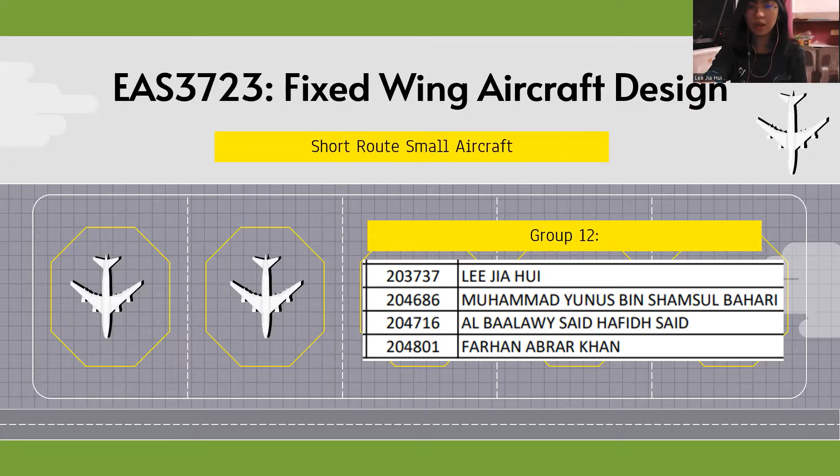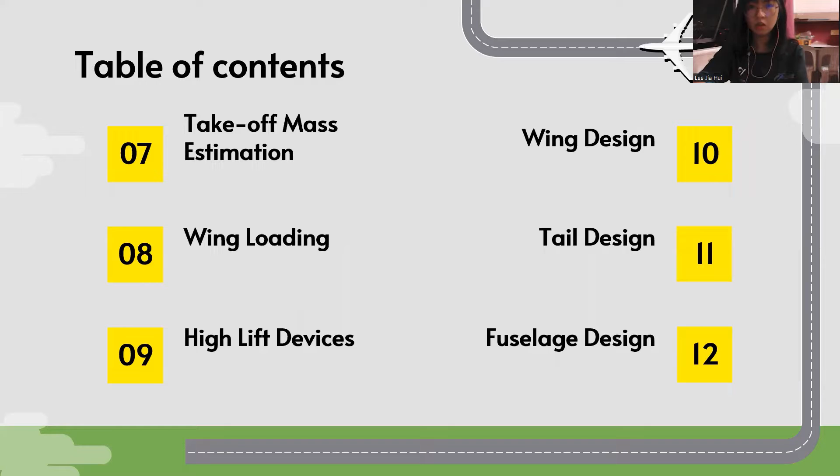So we will go through research of aircraft, engine selection, thrust-to-weight ratio, distance covered during climbing and landing, mission profile, basic parameters, takeoff mass estimation, wing loading, high lift devices, wing design, tail design, fuselage design, propulsion system, landing gear, electrical system, materials and fabrication of structural components, operational consideration, and lastly, market research.

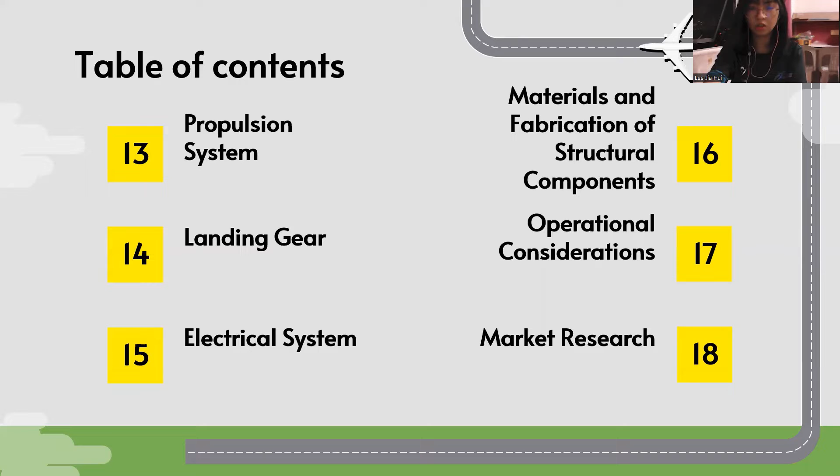The research of aircraft: we did research on 5 aircraft from small size to medium size. After the research, we chose a suitable engine for our aircraft. The engine we chose is a 4-engine turboprop.

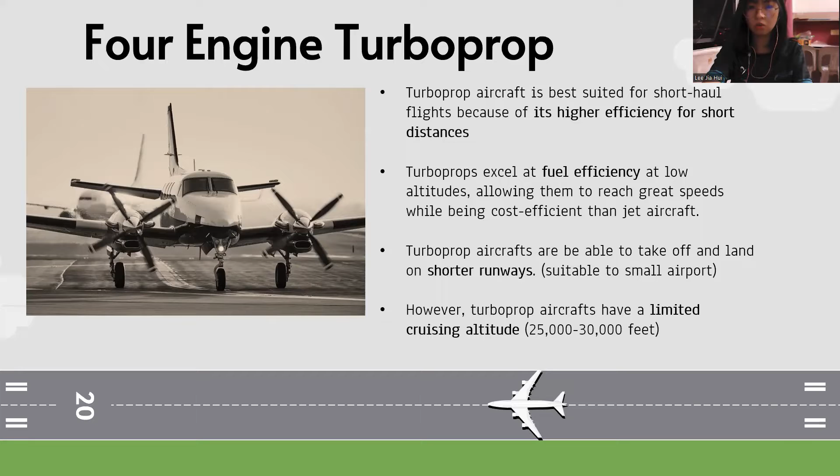Turboprop aircraft are best suited for short-haul flight because of their higher efficiency for short distance. Turboprop excels at fuel efficiency at low altitude. Turboprop aircraft are also able to take off and land on shorter runways, so it is suitable for small airports. However, turboprop aircraft have a limited cruising altitude, which is from 25,000 feet to 30,000 feet.

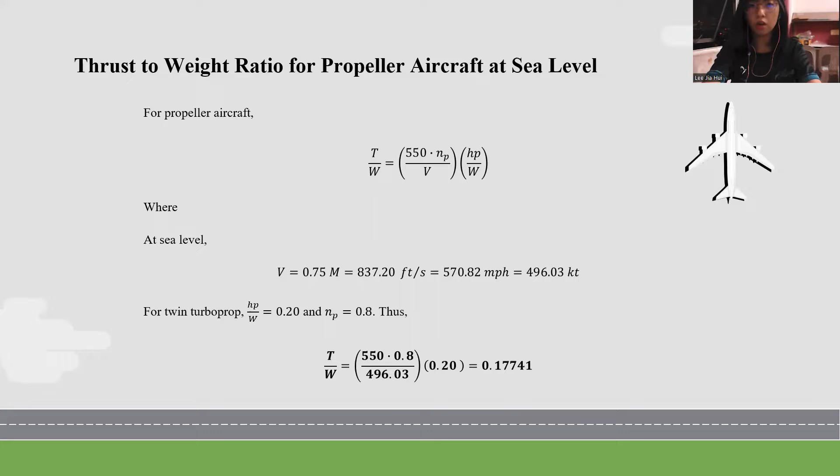The third part is the thrust-to-weight ratio. Thrust-to-weight ratio for our aircraft at sea level is 0.17741. Now we are going to show distance covered during climbing and landing.

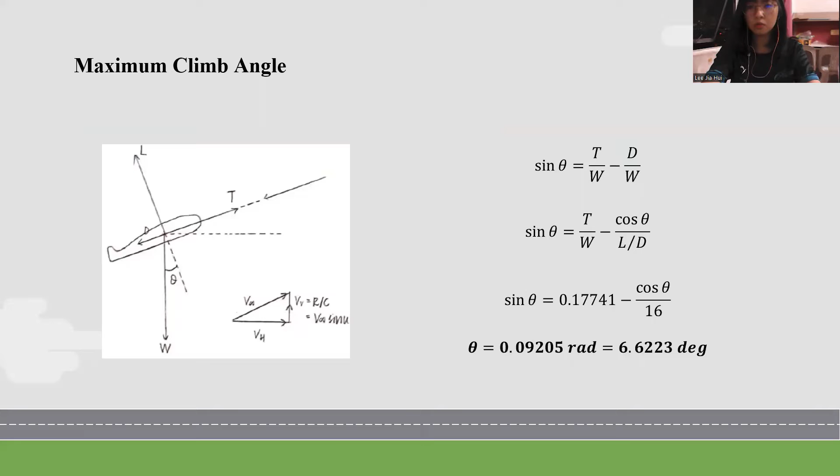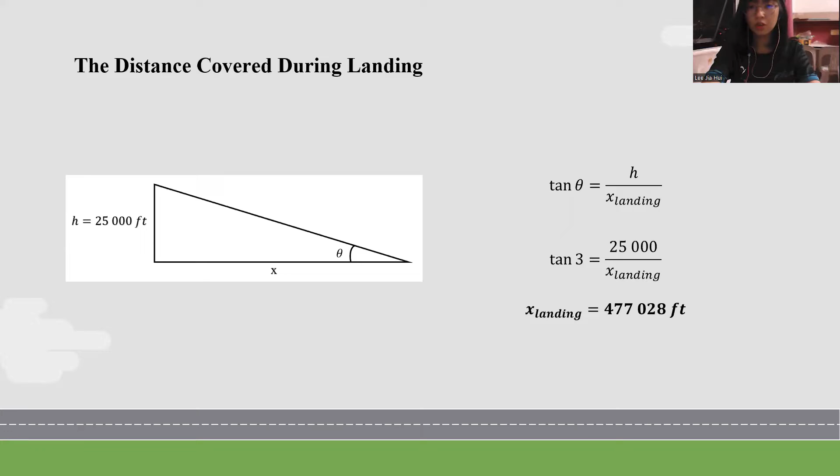The maximum climb angle is 6.6223 degrees, so the distance covered during climbing is 215,000 feet, and the distance covered during landing is 477,000 feet at 3 degrees of descending.

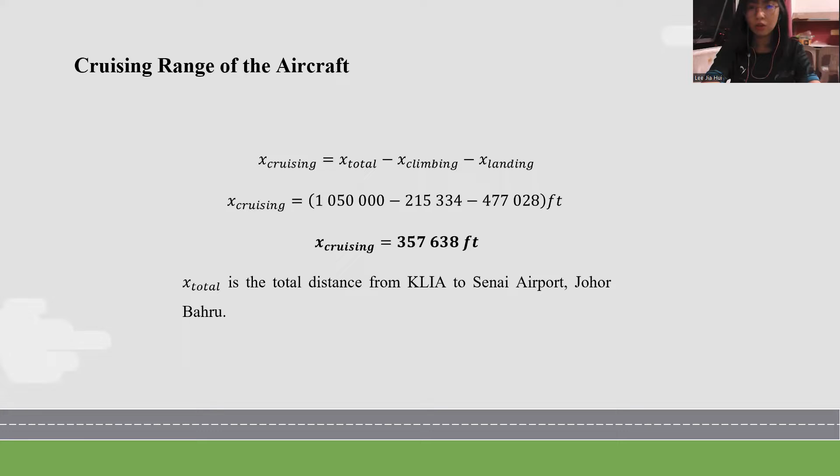The cruising range of the aircraft from KLIA to Senai Airport is 357,000 feet. Now we are going to show the mission profile.

First, the aircraft warms up and taxis for 10 minutes. Later, we will take off and climb to cruise altitude, reaching 25,000 feet. Later, it will descend to sea level, which gives range credit.

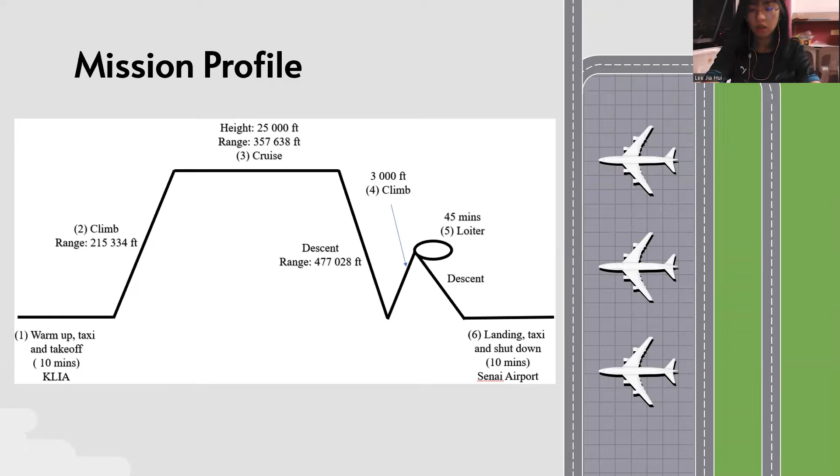After that, it will climb back to 3,000 feet and loiter at best endurance speed for 45 minutes and descend to sea level with no loiter time credit. And lastly, we will land, taxi, and shut down in 10 minutes.

There are a few basic parameters in our calculations. The total capacity is 40 passengers, while the mission capacity from KLIA to Senai Airport is 20 passengers, with 50% of total passengers. The engine type is 4 turboprop engines.

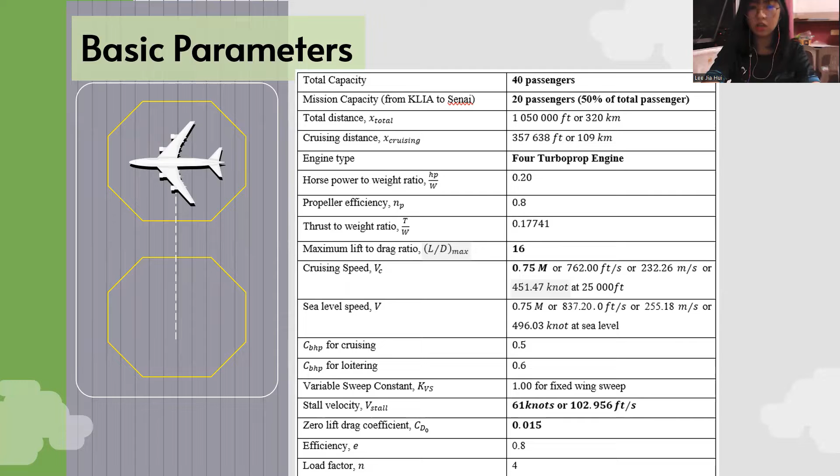The maximum lift-to-drag ratio is 16. The cruising speed is 0.75 Mach numbers. The stall velocity is 61 knots, and the zero lift-drag coefficient is 0.015.

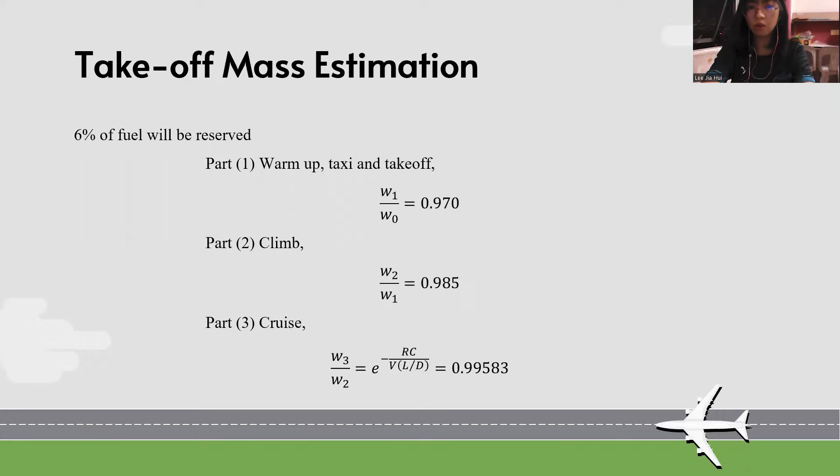The takeoff mass estimation: 6% of fuel will be reserved. There are some estimations from part 1, warm-up, taxi, and takeoff. Part 2, climb. Part 3, cruise. Part 4 is climb again. Part 5 is loiter. Part 6 is landing.

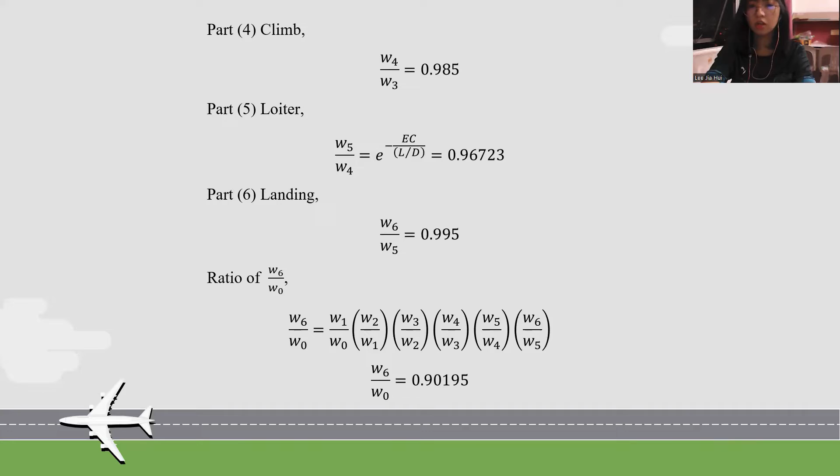So the ratio of part 6 to part 0 is 0.90195. So the ratio of fuel weight to maximum takeoff weight is 0.10393. Lastly, for single pilot, 1 flight attendant, and 20 passengers, the maximum takeoff weight is 6,560 kg.

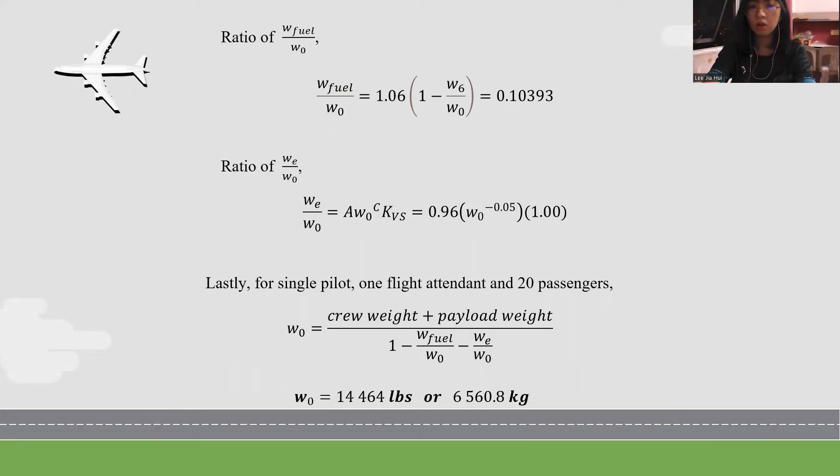The wing loading: we calculate the wing loading for takeoff condition, for stall condition, for landing condition, for cruising condition at maximum range, for cruising condition at maximum loiter, and lastly for sustained turn condition.

The lowest wing loading should be chosen to guarantee that the wing provides appropriate lift. The lowest wing loading is wing loading at stall condition, which is 10.17. Since the wing loading at stall is the lowest, the wing should be equipped with a high lift device.

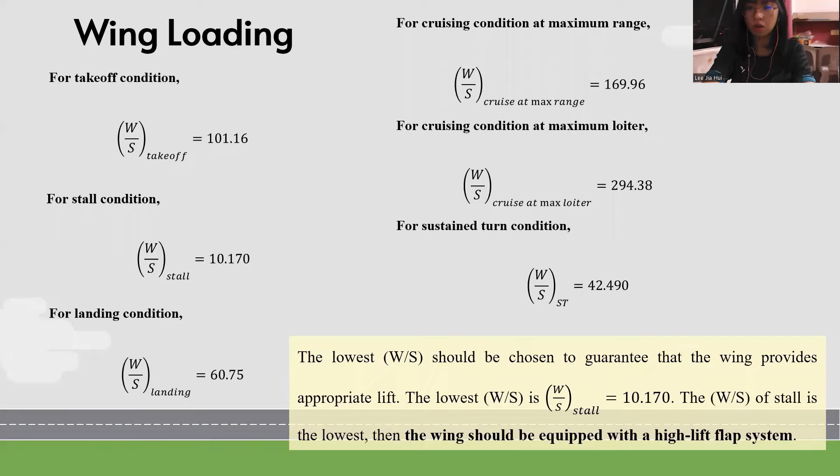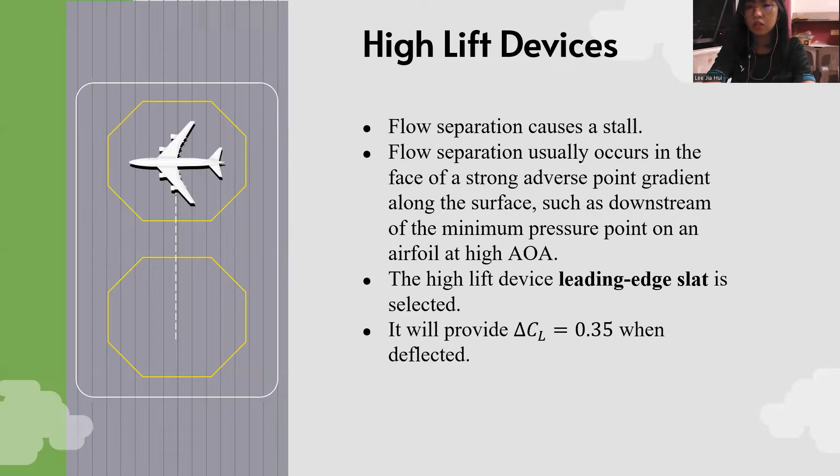So for high lift devices, we choose leading edge slats. Flow separation causes a stall. Flow separation usually occurs in the face of strong adverse pressure gradients along the surface, downstream of the minimum pressure point on an airfoil at high angle of attack. So it will provide an additional 0.35 of lift coefficient when deflected.

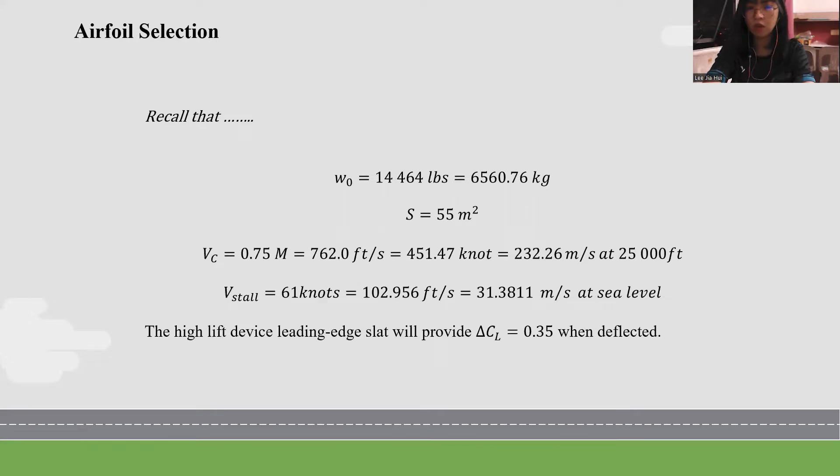The 10th part is the wing design. Before that, we recall that the maximum takeoff weight is 6,560 kg. The wing surface area is 55 meters square. The cruise speed is 0.75 Mach numbers, and the stall velocity is 61 knots.

So for ideal lift coefficient, the ideal lift coefficient is 0.092344, while the maximum lift coefficient is 1.9191. The following airfoil is matched with the design requirements, which is NACA 64112.

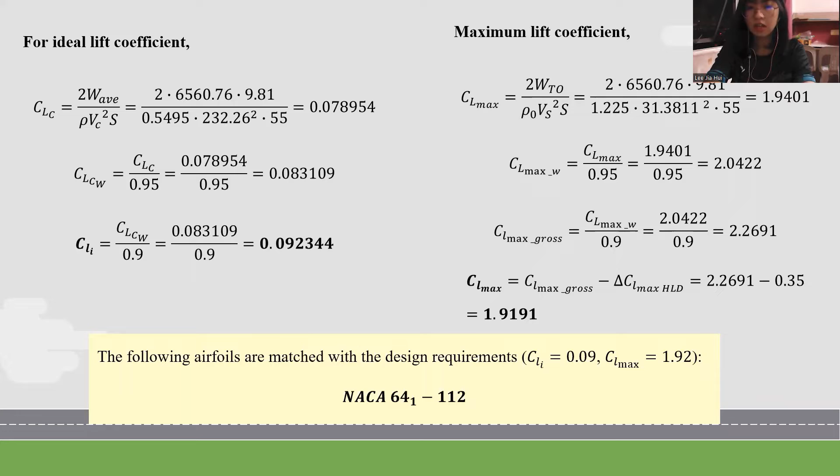Now we'll go to the flap parameters. The takeoff speed of the aircraft is about 10% faster than the stall speed. So the takeoff speed is 34.519 meters per second. The lift coefficient during takeoff is 1.6034.

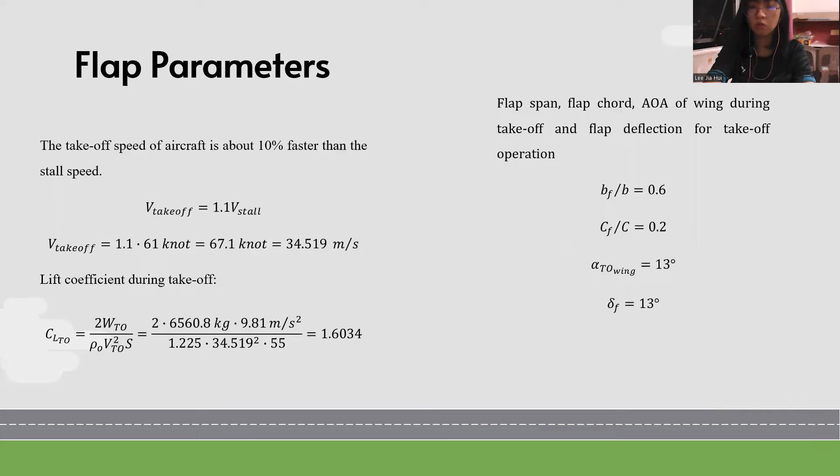There are some values for flap span, flap chord, angle of attack of wing during takeoff, and flap deflection for takeoff operation. The wing lift coefficient while the flap is deflected during takeoff operation is calculated using MATLAB. However, the value we calculated using MATLAB is slightly lower than the required takeoff lift coefficient.

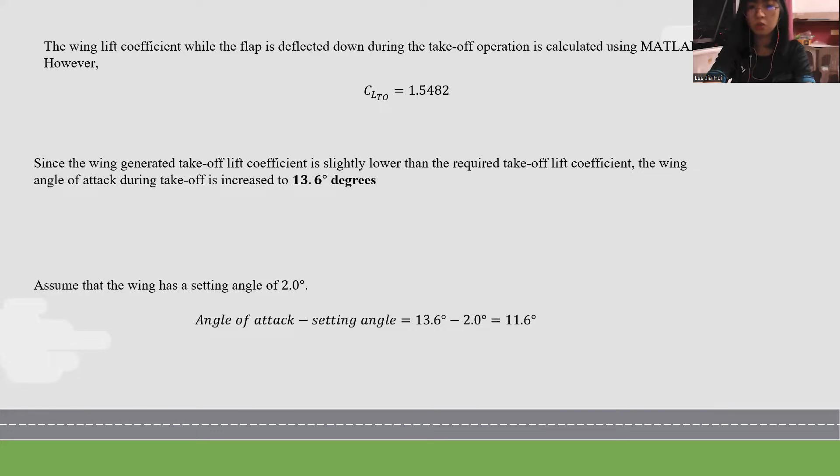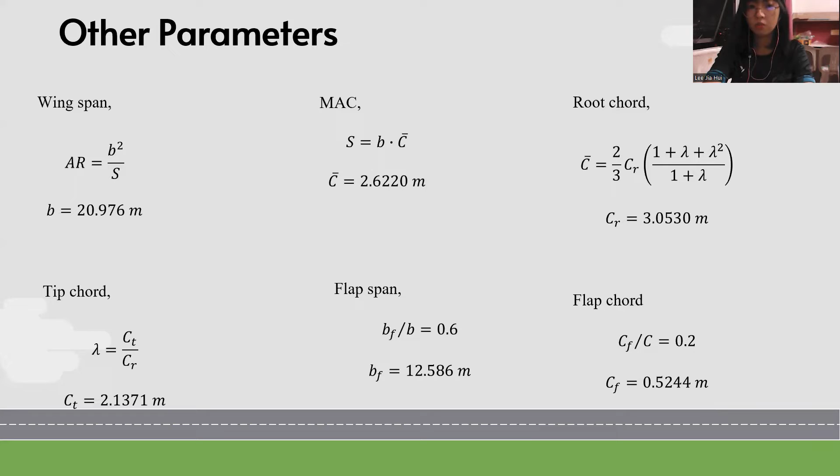So the wing angle of attack during takeoff is increased to 13.6 degrees. The setting angle is 2 degrees. So there are some calculations for other parameters, which are wingspan, mean aerodynamic chord, root chord, tip chord, flap span, and also flap chord. So we can see that the length for root chord is 3.05 meters, while the length for tip chord is 2.14 meters.

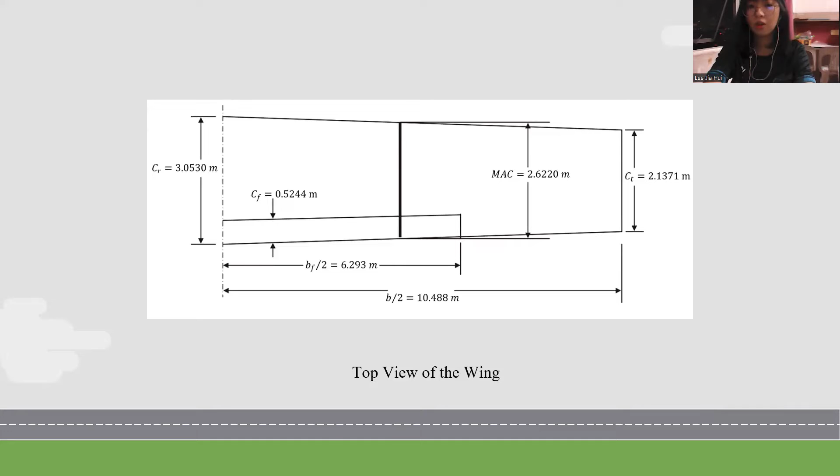The mean aerodynamic chord is 2.62 meters. The flap chord is 0.5244 meters, while the half of the flap span is 6.293 meters. The half of the total span of the wing is 10.488 meters. This is the side view of the aircraft.

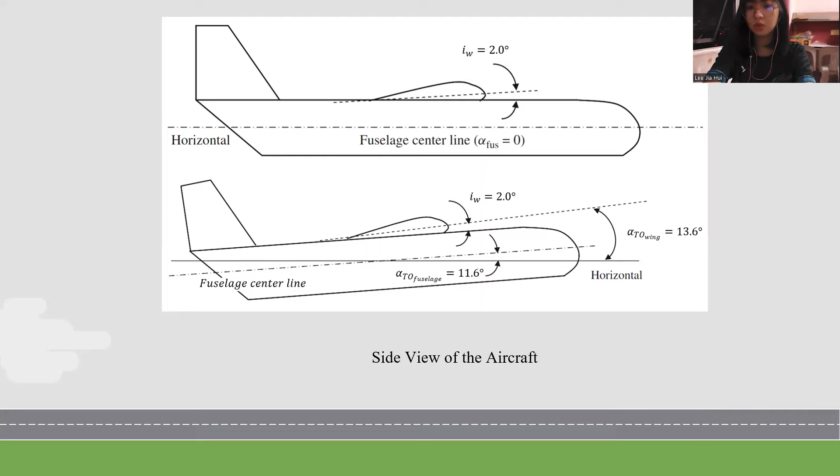The setting angle is 2 degrees. The takeoff angle for wing is 13.6 degrees, while the takeoff angle for fuselage is 11.6 degrees.

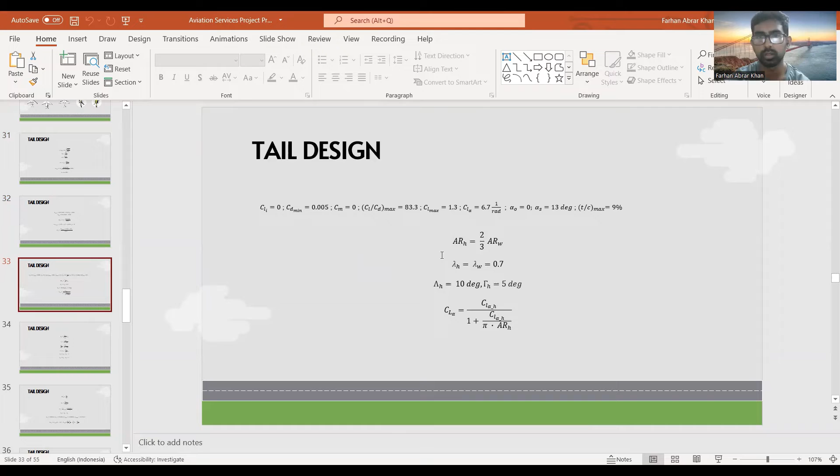So over here we have 5 to 6 values given to use in these equations below. Then afterwards we find these values, and lastly by finding this value we can know that this airfoil is NACA 0009.

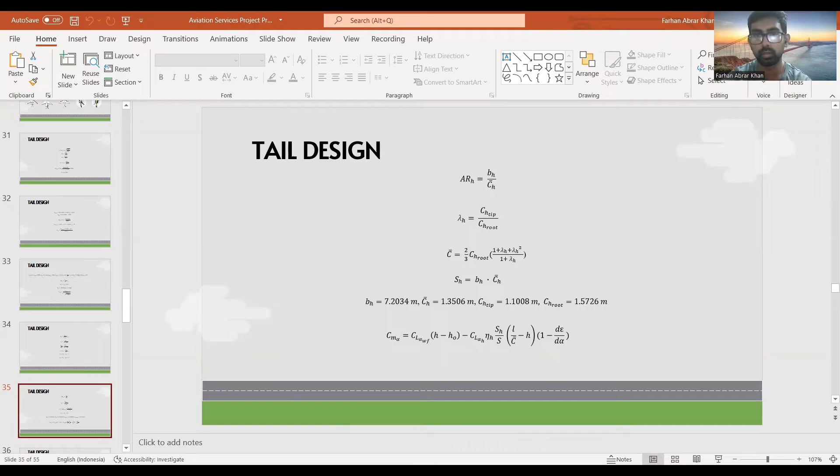So then we use these most important equations, and we find these parameters, and we use this last equation. All of this is given in this table. All of these values were calculated in the report, and over here you can just see the answers.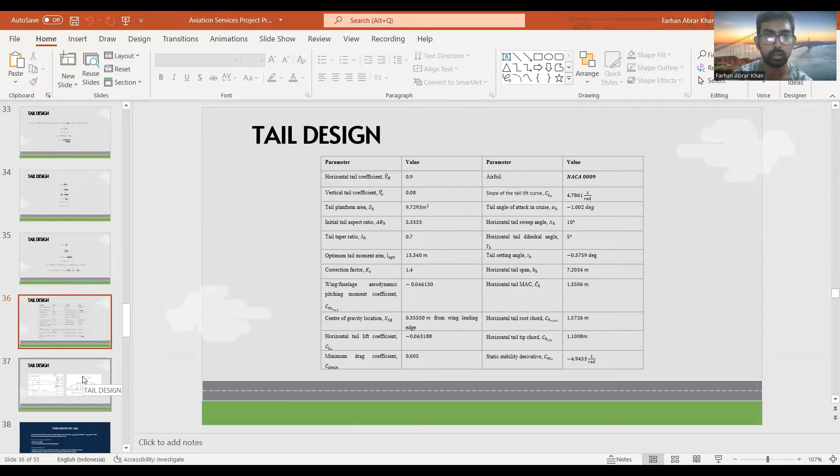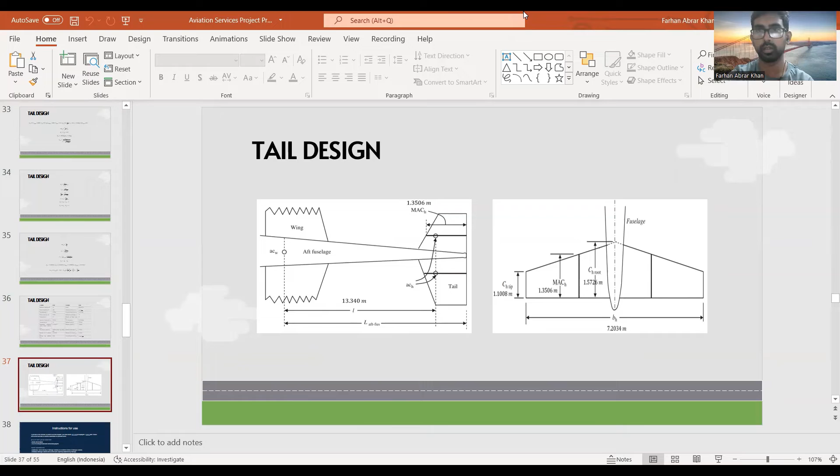And lastly, from all these answers we have come to this design. Over here you can see the length, the MAC, the chord depth, the breadth, and everything. So this is our final tail design. Thank you very much, that's all from me, and I'll let my friend continue the presentation.

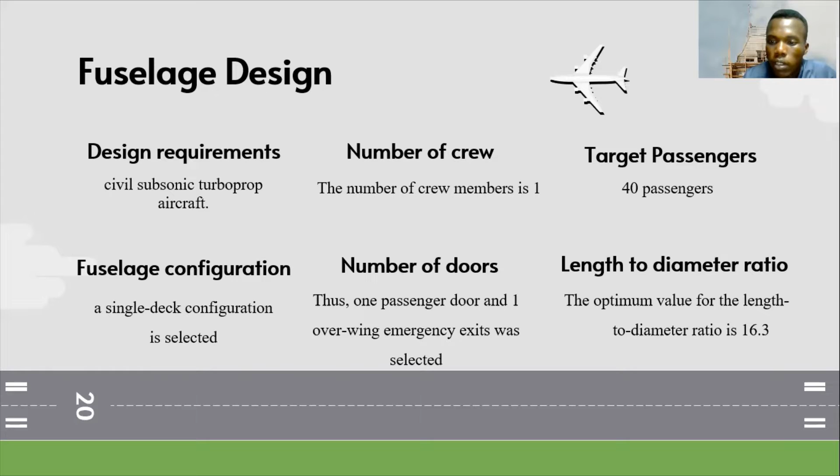Okay, I'm going to continue with the fuselage design. From the design requirement, it is a civil subsonic turboprop aircraft. Number of crew is 1 pilot. Total passengers will be 40. Fuselage configuration is a single deck. Number of doors is 1 passenger door and 1 overwing emergency exit, and the length to diameter ratio optimum is 16.3.

The possible configurations for our seats are shown here, and from the width of the cabin formula we can get NS, the number of seats in one row, WS, the width of the seat, NA, the number of aisles, and WA, the width of the aisle. So we can get the diameter of the fuselage by calculating the width of the cabin and increasing the thickness of the walls. Length of the cabin can be calculated from this formula, where we include the length of the nose, the cockpit, the cabin, the rear end, and the toilet together with the galley.

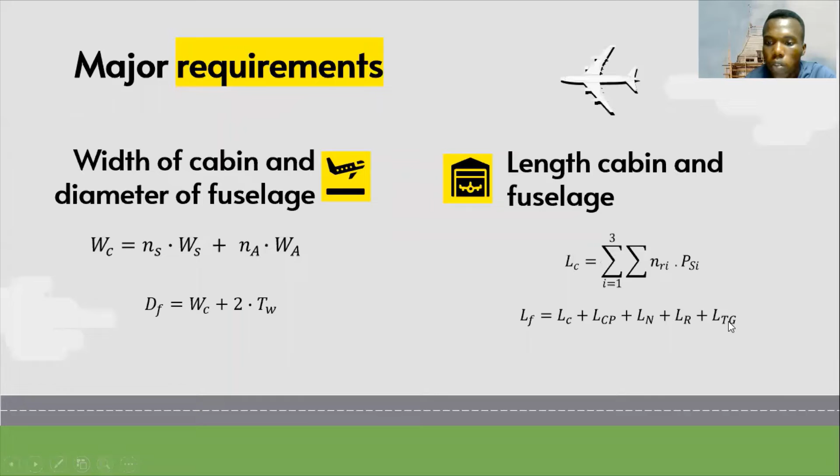So the fuselage designs are all calculated, and the optimum one is selected to be 3 seats in one row, with a total of 40 seats, and the length to diameter ratio is 10.6.

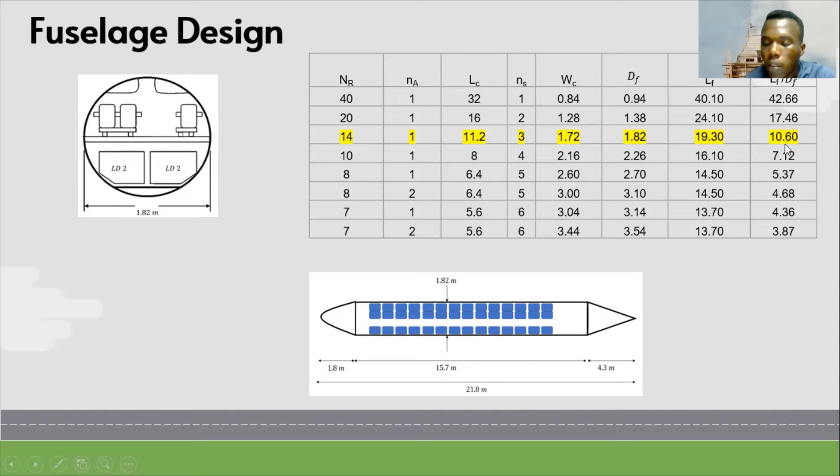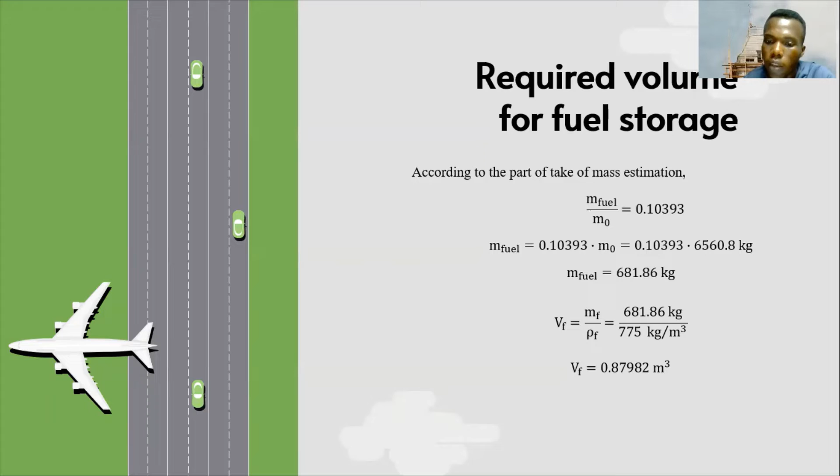The volume required for fuel storage is calculated here by using the MF to M0 ratio in the TOGW calculation, and we get the volume of fuel to be 0.87982. This fuel volume is combined with the volume of the cargo, and we can calculate whether the volume is sufficient or not from the volume of the total cabin.

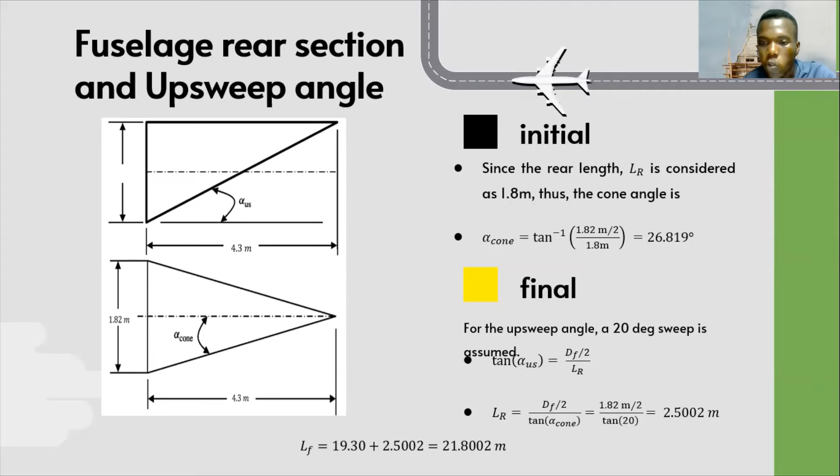For the fuselage rear section and the upsweep angle, we select the initial rear length to be 1.8, and the angle of the cone is 26.819, but it seems much higher than the suggested one. So we are going to select an upsweep angle of 20 degrees, and the length of the rear end is updated to be 2.5 rather than 1.8. Hence, the length of the fuselage is moderated. Thank you.

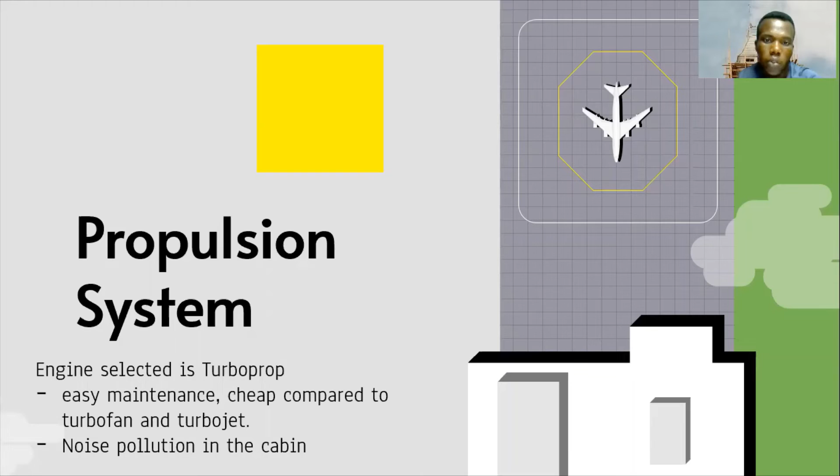For our aircraft, we selected the turboprop engine because it's easy to maintain and cheap compared to turbofan and turbojet, and it has less noise pollution compared to the piston engine. From that, we are going to calculate the engine thrust and the power required during cruise.

So from the formula of the coefficient of lift and K, we can get the coefficient of drag. And from the coefficient of drag, we are able to get D, the drag force. And since for an aircraft to fly, the thrust must be equal to the drag force, we get the thrust force to be 12478 Newton.

And from that, we can calculate the power of the engine if we have the velocity of cruise and the efficiency of the engine. Both values we have, and we can get the power required during cruise. From the power required during cruise, we can get the power required at sea level, and both values are displayed here: 4858.1 and 12717 horsepower.

The diameter of the propeller and the propeller rotational speed can be calculated from the formula of the diameter of the propeller. We can get all the values: the aspect ratio of the propeller, the efficiency of the propeller, and the power. From that, we can get ω, the rotational speed, and we can get the number of revolutions per minute N from the formula of 60 times rotational speed over 2 pi.

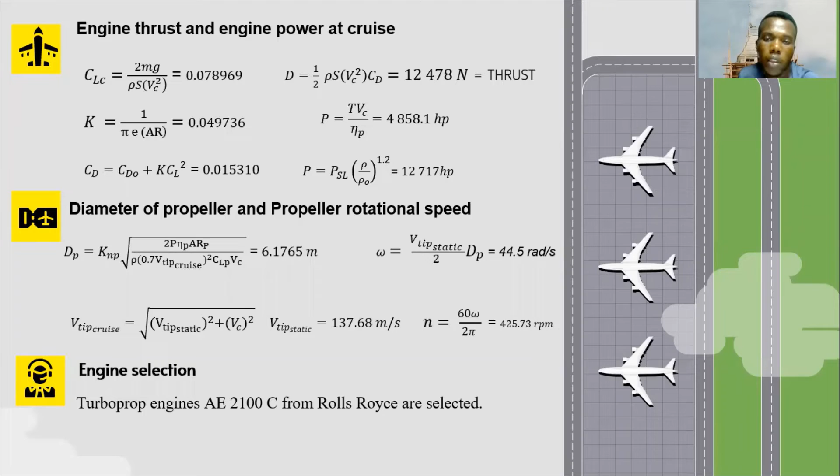And lastly, from the data of the power required, we can select our engine. So the engine selected is the Rolls-Royce AE2100C. That's the propulsion. Thank you.

So I'll be presenting about the landing gear, electrical systems, and materials used on the aircraft.

The landing gear of the aircraft is designed as a tricycle. Aft of the tricycle's center of gravity are the two main landing gears, and at the nose, an auxiliary gear. Due to the location of the primary gears, this layout is very stable because it is very close to the center of gravity.

Due to the configuration of the tricycle, the aircraft is also easy to maneuver and taxi. Compared to a tail wheel landing gear configuration, or tail dragger, the tricycle configuration also provides better view over the nose of the aircraft and a flat cabin floor for better movement of passengers and goods.

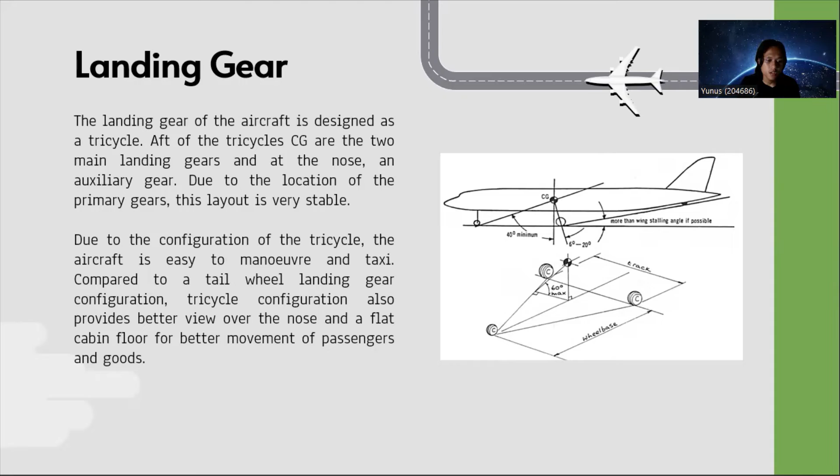Next is the electrical systems. For a turboprop aircraft, there is a starter for each engine, and at least one battery that provides electricity to a 28-volt DC electrical system.

The generator starts the engine using electrical power, and after the engine gets going, the rotation of the engine generates electricity in the form of direct current, which is then converted into 400 Hz AC to be used for certain equipment on the aircraft, such as avionics or lights.

In order to prioritize certain equipment, the power distribution is organized into buses. Most of the aircraft's electrical system is served by the main buses. There are also current limiters to protect the buses from issues such as short-circuiting.

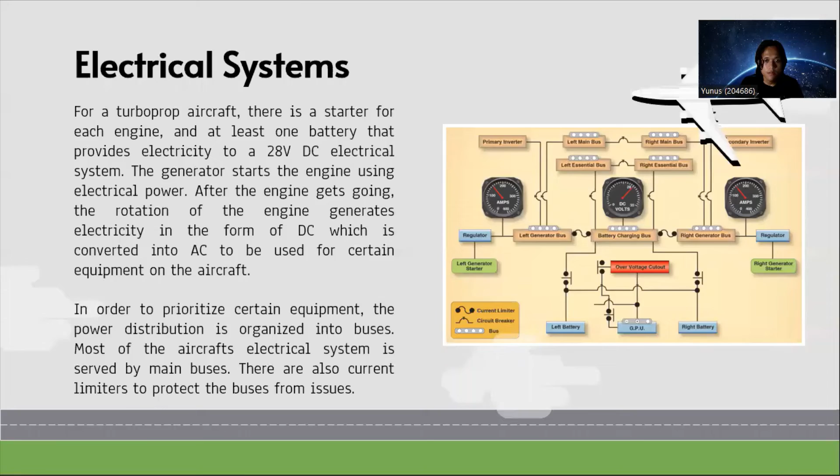Next is the materials and fabrication of structural components. When choosing materials for an aircraft, there are a few main considerations to be made, such as strength, weight, stiffness, toughness, fatigue resistance, and corrosion resistance.

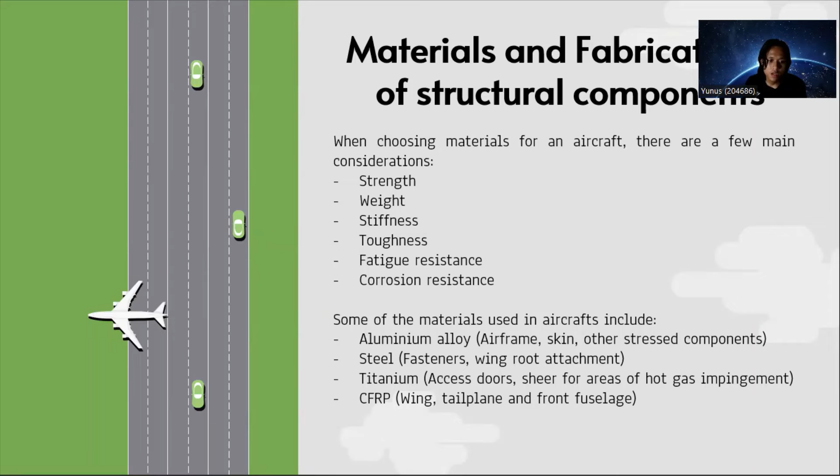Some of the materials used in the aircraft include aluminum alloy, which is used to produce airframe, skin, and other stress components; steel, which is used to produce fasteners, wing root attachment, or tracks; titanium used for access doors or as shear for areas of hot gas impingement; and carbon fiber reinforced plastic, or CFRP, for the wing, tailplane, and front fuselage. So, fabrication of structural components.

For the wing, thin aluminum alloy web and flanges are extruded, machined, and bolted or riveted to the web, making up the spar of wing designs. The ribs are manufactured from sheet metal in 3 pieces.

For the skin, longitudinal stiffeners and rib flanges are riveted to the skin. Since aerodynamics is important in the front chordwise regions of the wing, it has to be very smooth, and therefore countersunk rivets are used as opposed to dome-headed rivets, since countersunk rivets are flat when they have been riveted onto the wing.

And lastly, stiffening of flying control surfaces. A sandwich panel is a type of construction that has a thin corrugated metal or honeycomb structure core, which is sandwiched between 2 outer skins of a stress-bearing sheet. Sandwich panels feature smooth interior and exterior surfaces and can withstand high loads.

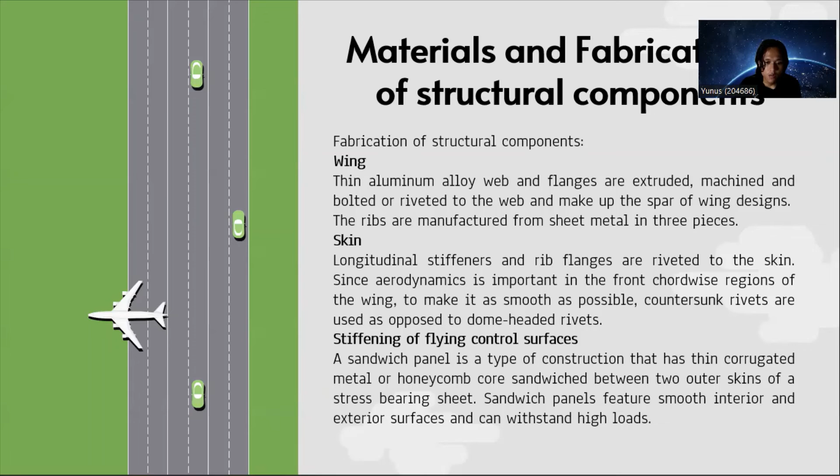Now I'm going to present the operational considerations. According to Chapter 15 in the Airplane Flying Handbook, regarding turbo propeller-powered airplanes, the engine will face some difficulties.

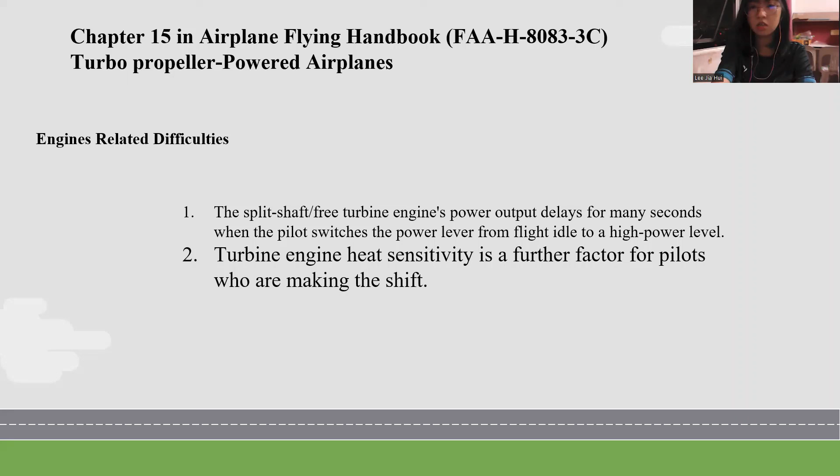The first is that the split shaft or free turbine engine's power output delays for many seconds when the pilot switches the power lever from flight idle to high power levels. The second is that turbine engine heat sensitivity is a further factor for pilots who are making the shift.

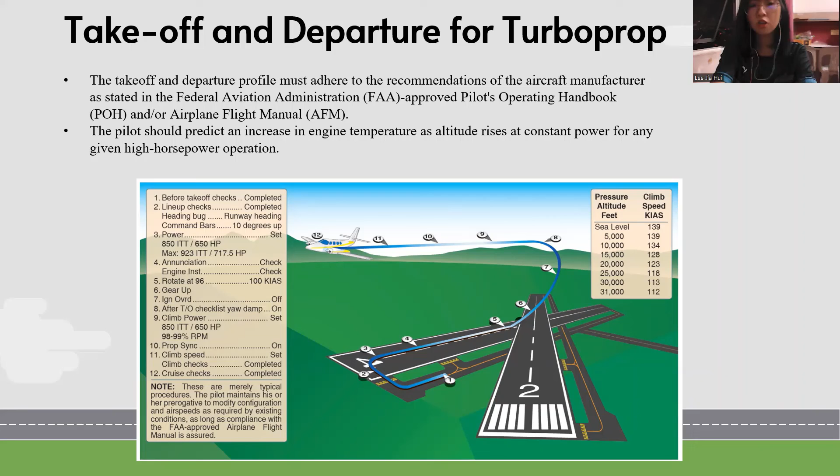Next, I will show the takeoff and departure for turboprop aircraft. The takeoff and departure profile must adhere to the recommendation of the aircraft manufacturer as stated in the Federal Aviation Administration approved Pilot Operating Handbook and/or Airplane Flight Manual. The pilot should predict an increase in engine temperature as altitude rises at constant power for any given high horsepower operations. So the figure shows the mission profile for takeoff and departure.

The second part is arrival and landing. The approach and landing process must start with a stable approach. In a stabilized approach, the aircraft is placed in a stable descent on a glide path that ranges from 2.5 to 3.5 degrees. So the figure shows the mission profile for arrival and landing.

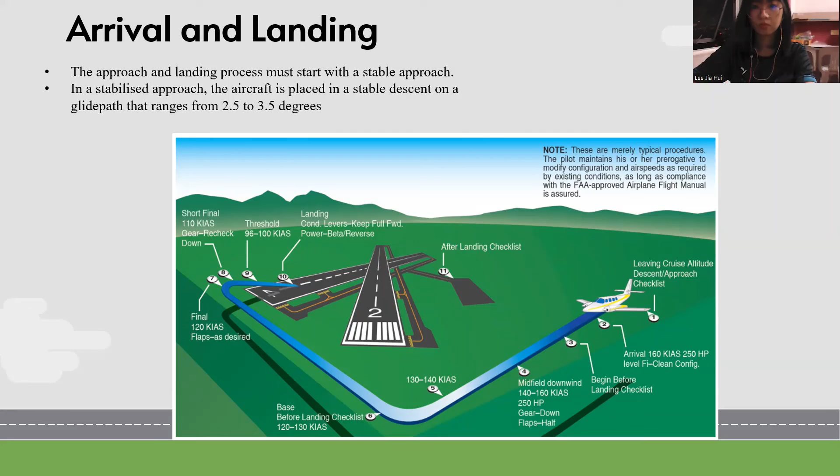For car, it is 3 hours, and the cost is 80 ringgit. For the bus, it is 4 hours, and the cost is 38 ringgit, and the train is 30 ringgit.

So by taking into account the disadvantages and advantages, we can conclude that it is feasible to set the Johor to Kuala Lumpur route, because the cost is not too high and the time taken is only 1 hour. We are going to further consider in the report the cost for fuel and labor in aircraft, and form a good structure on how to run the airline.